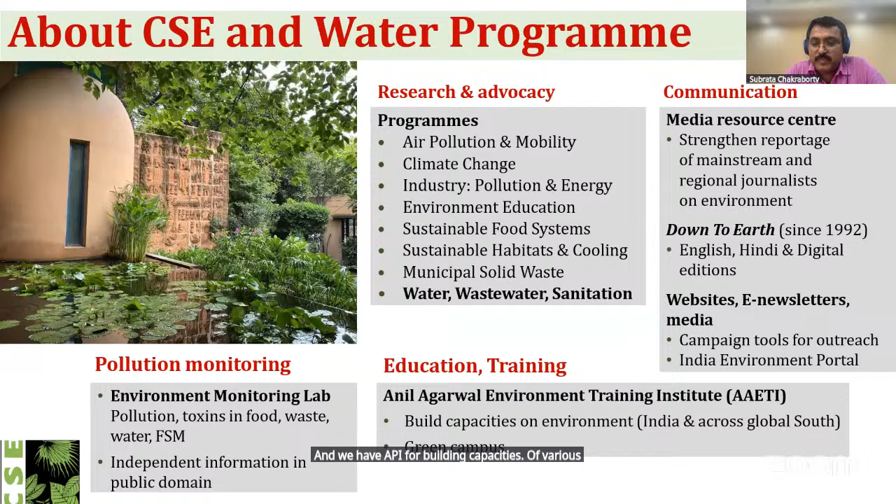Next, please. In our water program, we work in both urban and rural areas, with a water and wastewater vertical, and we work closely with the Uttar Pradesh government. In the water sector, our focus is water sensitive urban design and planning, groundwater recharge, rainwater harvesting, protection and rejuvenation of water bodies, and water efficiency promotion. In sanitation, we work on faecal sludge and septage management, city-wide inclusive sanitation, grey water management, decentralized wastewater management, and reuse of treated water and biosolids.

In UP, we closely work with the Department of Urban Development and support the government in scaling up FSSM, which is closely associated with AMRUT 2.0. We have a team of 15 members of diverse backgrounds. Capacity building is one of our focus areas, through which we have built capacities of thousands of practitioners and policymakers over the last couple of years. Next, please. Our program has close association with various development institutions across countries. Next, please.

And whatever we research, we come up with publications. Those publications are available for public, and all these publications, this is a couple of them, and all the publications are available on our website for easy download.

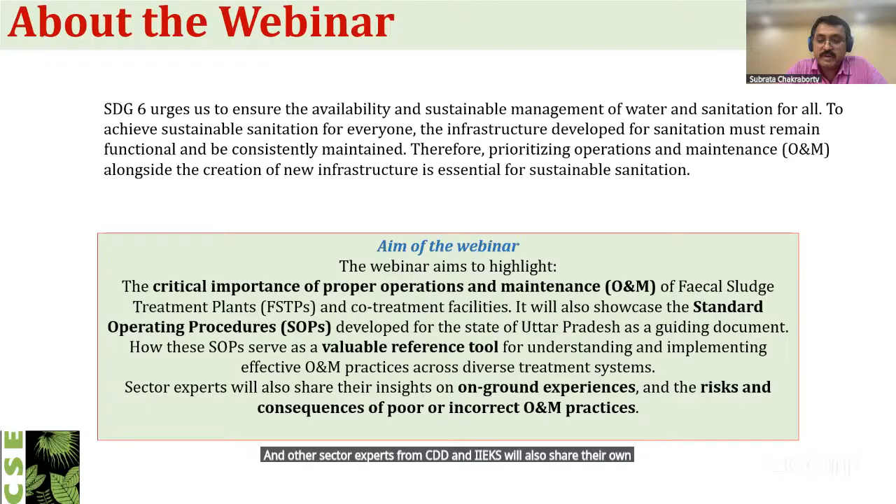Next, please. Urban areas across India and globally are adopting FSSM plants as a sustainable alternative to conventional wastewater systems. In India, Uttar Pradesh, Odisha, Maharashtra have emerged as front runners, and also other countries globally, to mention a few, Bangladesh, Ethiopia, and many other countries are constructing and operationalizing various FSSM plants.

However, on ground infrastructure, the key priority is to have proper O&M in place. And now, as I told, CSE has developed a document which we consider could be critical for many of the countries, many of the plant operators.

Our practitioners from CDD and IIHS have also joined today to share their field experiences so that we have sharing of learning across states here. Today's session aims to empower practitioners with practical tools for long-term FSTP sustainability.

Now, with this, we move to the thematic presentation. This is a very technical session, and the first theme is SOP for O&M of FSTP and co-treatment plants of Uttar Pradesh. Here, Harsh Yadava from CSE will briefly describe the structure of the SOP document and why this could be an important reference document for professionals and for those who are working towards sustainability.

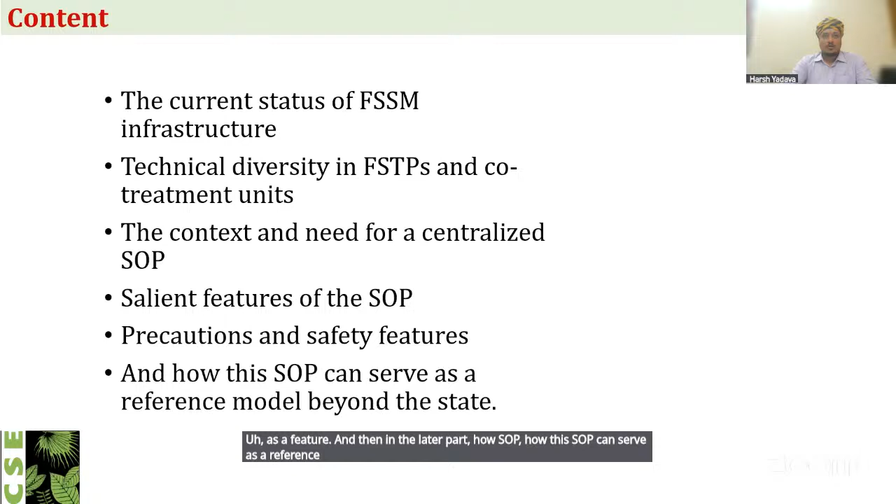And then in the later part, how this SOP can serve as a reference model beyond the state, at national and global stages also. So when we talk about FSSM and Uttar Pradesh, it started

it was followed by a tender of 59 FSSM projects in Uttar Pradesh by the stakeholders, by the government of Uttar Pradesh. Of those, 41 of the projects were completed by 2023 due to some delays caused by COVID-19. And in 2024, out of these 59 projects, 58 projects were commissioned.

Currently, we have 39 FSTPs and 20 co-treatment plants. All these come under different funding agencies like AMRUT, State Mission for Nirmal Ganga, and the City 15th Finance Commission funds.

If we understand how FSTPs have come about, there were around 11 contractors who came up with their own type of treatment configurations, a vast variety of configurations. When the CSE team entered the ground, we observed around 15 to 20 configurations of FSTPs, but later we tried to streamline this into 4 broad classifications, which I'll discuss in the next slide.

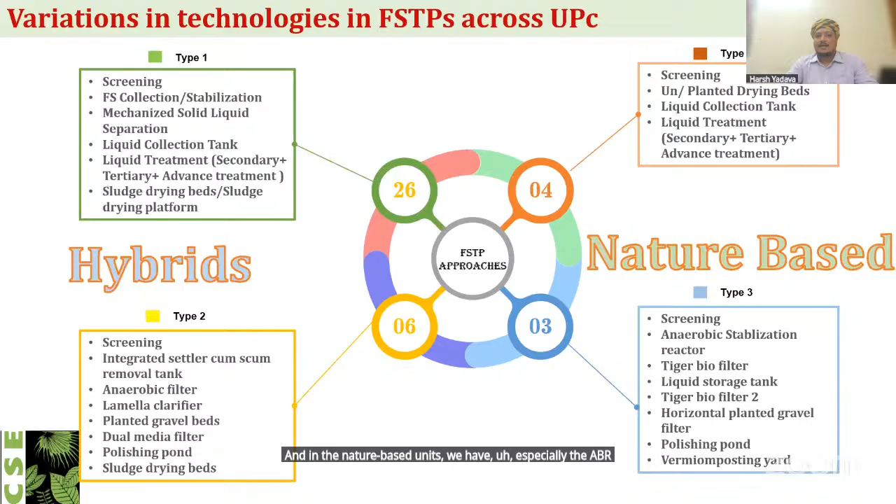Similarly, for the co-treatment plants, we had 6 contractors who came up with their own different types of technologies and configurations. We streamlined it into 5 different configurations. Overall, we have 5 types of capacities: 100 KLD, 75 KLD, 50 KLD, 25 KLD, and 20 KLD. 25 KLD co-treatment plants are the most in number, that is 11.

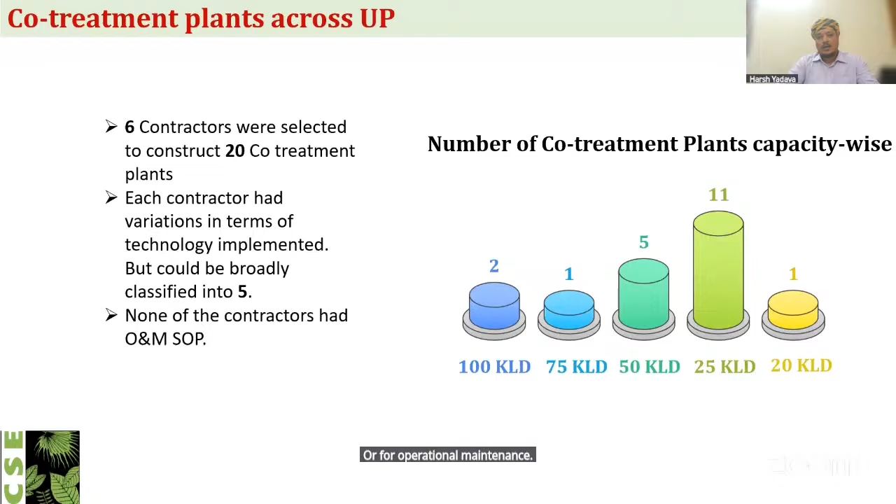As similar to what I told in the case of FSTPs, none of the contractors gave a standard operating procedure for reference or for operation and maintenance. So these are the broad classifications of co-treatment units in Uttar Pradesh. The most common one has a screen chamber, followed by solid-liquid separation, where the solid goes to drying beds and liquid goes under some digestion process in an anaerobic tank and planted gravel beds.

From the previous slides, we understand the basic reasons why the SOP was developed. During this time, it was also understood on the ground that there was minimal involvement by the ULB during the tender process and construction of the FSTPs, due to which there was very low familiarity with the treatment system. Further, as the technologies were very diverse in nature, operation and maintenance was not focused on completely by the ULBs, because there was no reference for operation and maintenance, as SOPs were not present.

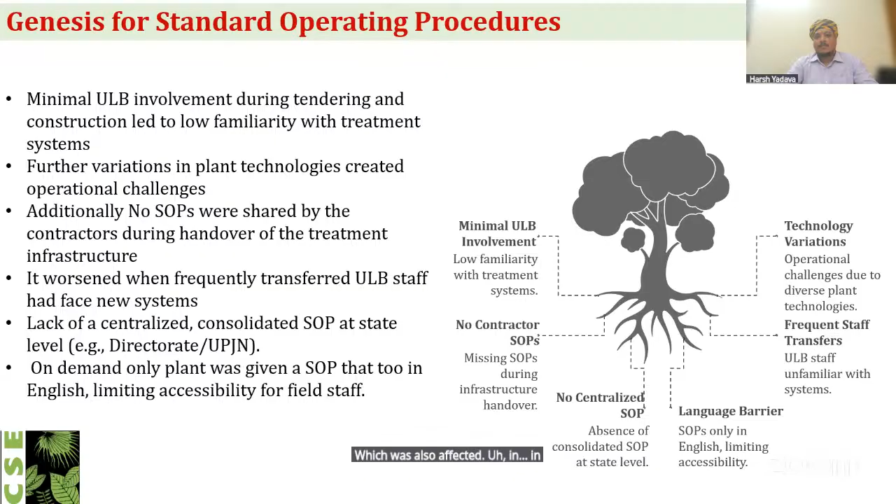Further, as we already know, government staff get frequent transfers. So a staff member who has worked with one kind of treatment technology in one city finds it difficult to cope with a different kind of technology in a different city, with no reference for operation and maintenance. Only one SOP was provided at an FSTP, and that too was in English, which was very difficult for operators to understand. This was also a factor in making an SOP at a centralized level. So all these were the genesis for creating an SOP at a centralized level.

Center for Science and Environment, along with the Department of Urban Development, published this SOP document in December last year. It was launched by the Director of Urban Local Bodies, Mr. Anuj Jhaji. Now let's understand exactly what the treatment process is.

When it comes to fecal sludge and septage treatment, it is a mixture of a vast variety of constituents, solid waste, and many other things. Since there are many constituents, it requires many kinds of treatment processes and systems with multiple processes of treatment: physical processes, biological processes, chemical processes, photolytical processes, and for biosolids, different kinds of other processes.

Physical processes could be sedimentation and filtration, mostly used for separating solids from the liquid part, depending on the specific gravity of the solids to separate from the water when an external agent is introduced. Biological processes are the heart of the treatment, using anaerobic digestion processes to break down the organic matter. Chemical processes are employed at different stages.

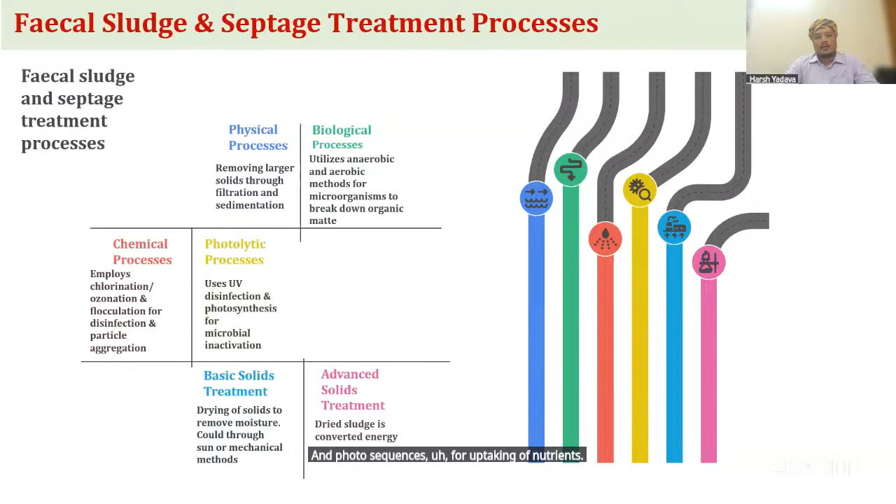As I told you, coagulation is done through an external agent to expedite the process of solid-liquid separation. The photolytic processes, for example disinfection through UV radiation, kill the pathogens in the water. Photosynthesis helps in uptaking of nutrients for purification of the biosolids part.

Now let's understand the treatment stages. We can see primary treatment, secondary treatment, and tertiary treatment. In the primary part, we focus on removal of the solid part. In the secondary treatment part, we focus on removal of BOD and COD and some inorganic materials like nitrates and phosphates. In the tertiary treatment, we focus on removal of pathogens like bacteria, fungi, protozoa, and viruses. Similarly, in the sludge processing units, we do the same by killing pathogens.

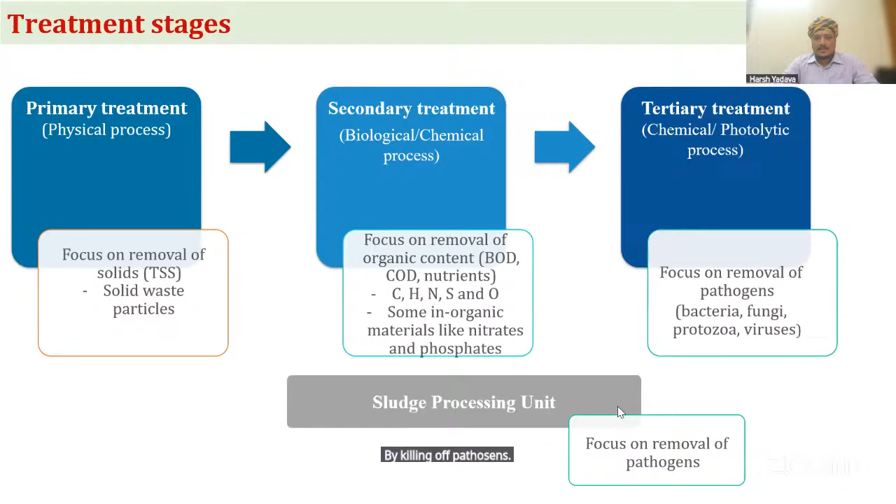Let's move forward and understand the treatment chain for FSTPs of Uttar Pradesh. The treatment chain you are seeing in front is the most common one, used by around 15 to 16 fecal sludge treatment plants of Uttar Pradesh. All these modules included here in the primary, secondary, and tertiary treatment parts are included in our SOP.

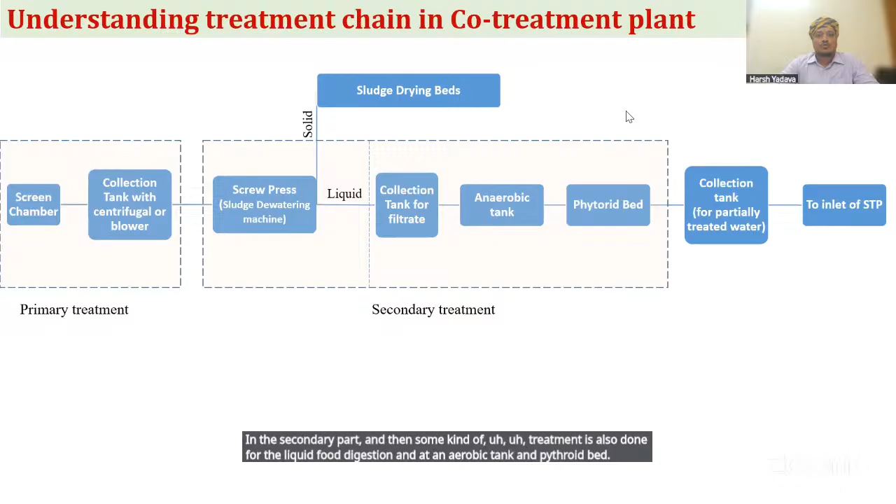Other than this, there are a few other treatment chains whose modules are also included, completing the package for FSTPs. When it comes to co-treatment plants, the most used treatment chain is the screen chamber, followed by a screw press for solid-liquid separation in the secondary part. Some kind of treatment is also done for the liquid through digestion, anaerobic tank, and Phytorid bed. The solid part goes to the sludge drying bed, and the liquid part after the Phytorid bed goes to the STP inlet for further treatment.

Other than the common one, we have other modules also described in the SOP, which we can see here, and it completes the package for the co-treatment units.

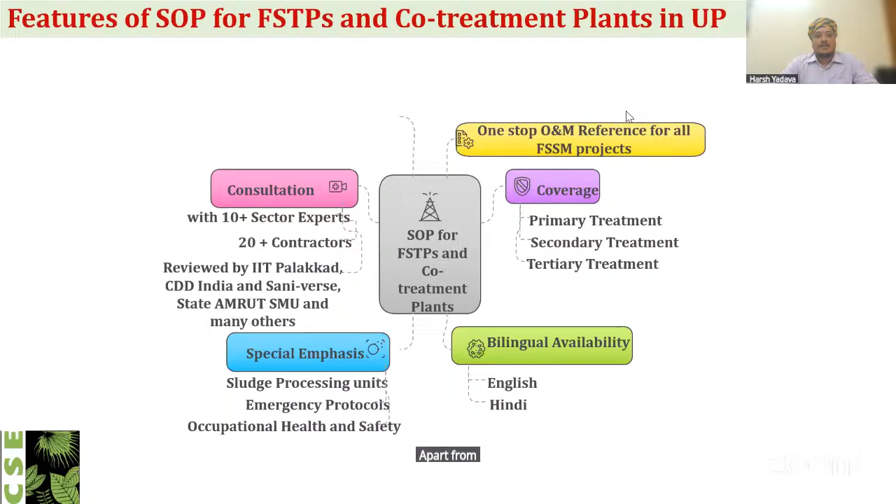So some of the features are already clear from the previous slide. We can say that the SOP is a one-stop reference for all FSSM projects in Uttar Pradesh and at the national level also. It covers primary, secondary, and tertiary treatment. It has been published in two languages, English and Hindi, giving it wider usability. Special emphasis has been given to sludge processing units, emergency protocols, and occupational and health safety units. Before publishing, it was sent to 10 plus sector experts, 20 plus contractors, and also reviewed by IIT Palakkad, CDD, and Saniverse, apart from the State AMRUT SMU of Uttar Pradesh.

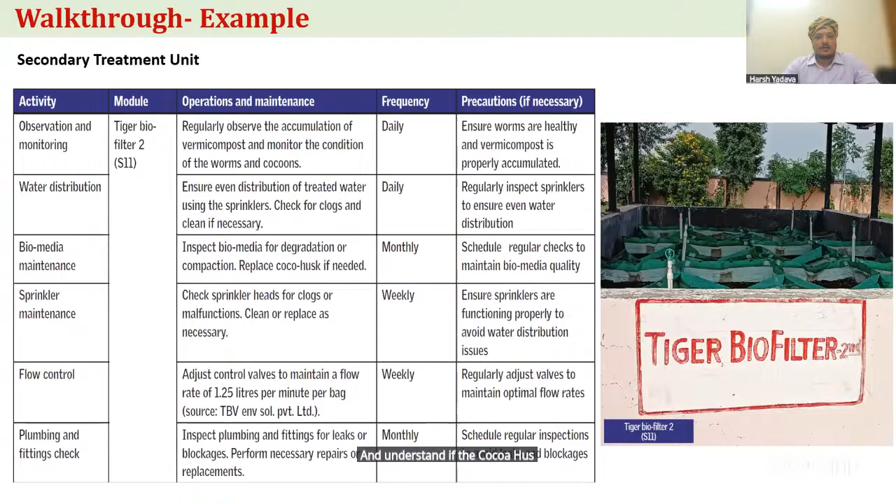Similarly, we have the secondary unit, the Tiger biofilter, second part: biomedia maintenance. Let's take as an example the activity of biomedia maintenance. What is the process here? We have to inspect the biomedia for degradation or compaction and understand if the coco-husk is required for replacement or not. This has to be done monthly.

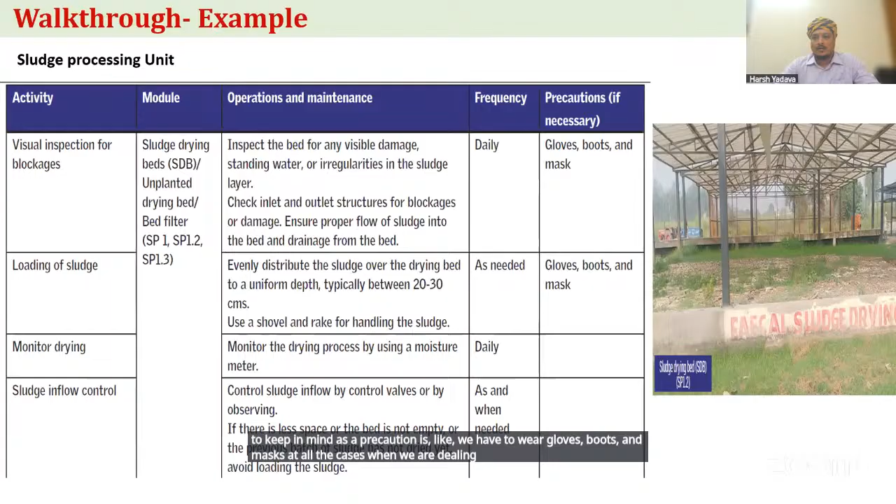We have activity, we have module, and we have operation for sludge drying beds. And we can see what are the visual inspections, the activities that we have to do on the field. If there is an operator, the operator has to do some visual inspection for blockages and understand if there is any visible damage, water standing, or irregularities in the sludge layer. And these things we have to do daily. And the things which you have to keep in mind as a precaution are, we have to wear gloves, boots, and mask at all the places when we are dealing with fecal sludge drying beds.

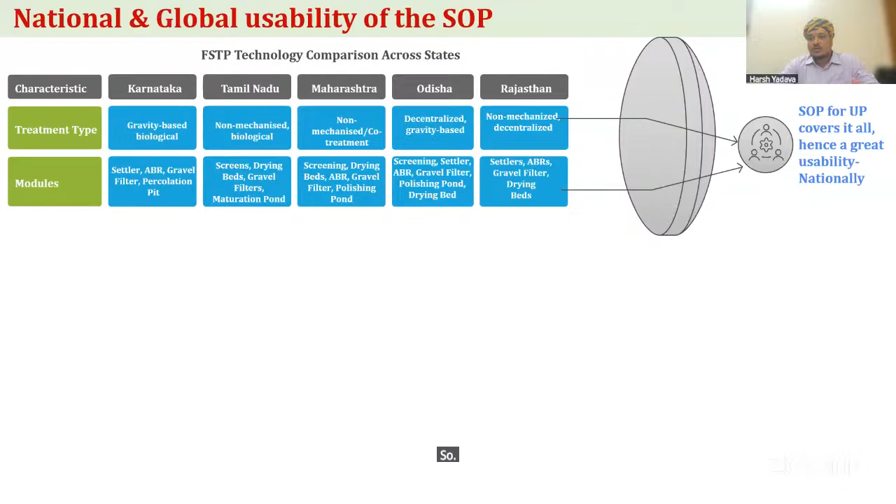So here we have compared different types of modules present in the different states of India. As we can see, most of the common modules present in Karnataka, Tamil Nadu, Maharashtra, Odisha, Rajasthan are already present in the standard operating procedure we have prepared. So the usability of this document increases from here to the national level, and further at the global stage, the countries who are initiating their FSSM projects or entering into tenders can take reference of what kind of treatment chains would be perfect for their own context and setting.

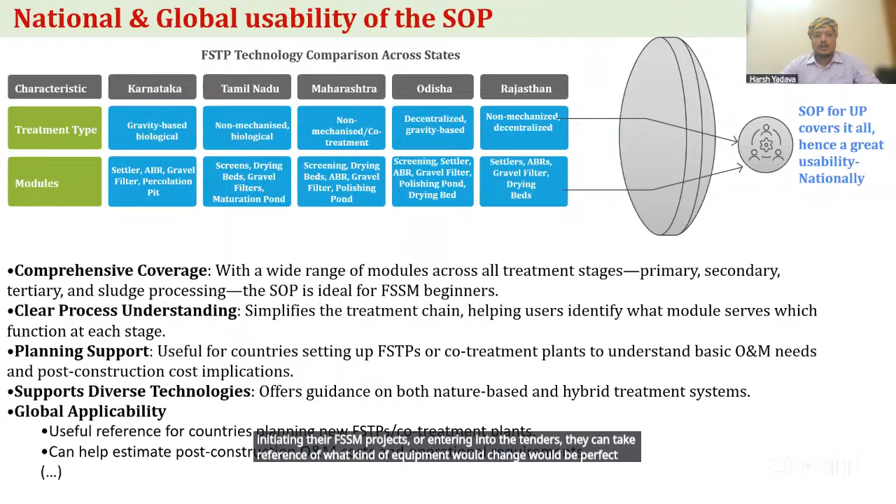Another thing this SOP offers you is that there is a wide variety of safety measures and emergency response units we have covered in this SOP. For example, if there is an accidental spillage from the truck at the fecal sludge treatment plant, what would be the emergency response procedure for that? How will you tackle that? Or maybe your sludge drying bed is flooded. So what would you do? What would be the protocol for that? All these have been included in the SOP.

And Harsh, you actually made my work much easier. But just to start on a lighter note, the picture you have given of me makes me appear such a serious and such an angry person. I'm not actually.

So just to talk about it, as they said, Harsh and Hari were the frontline warriors when they were working in UP, developing and understanding, and creating that environment to make the FSTPs work.

Behind them, we were some kind of soldiers who were giving them those scientific inputs. Based on the engineering design, each of these units had a particular output performance they were designed for, that the contractor had claimed. We went out to these FSTPs, we collected samples, I'll talk about what we did, and then we tried to understand, if something is going perfect, how is it going perfect, right?

If something is going wrong, if there is a challenge, where is the challenge? Where exactly lies the problem that could be mended? And that is how this backing up of the lab actually helped. I'm sure Harsh and Hari and every team would say that it helped them to talk about the science in a layman's perspective, to make them understand and get the FSTPs up and running and improving on their performance gradually.

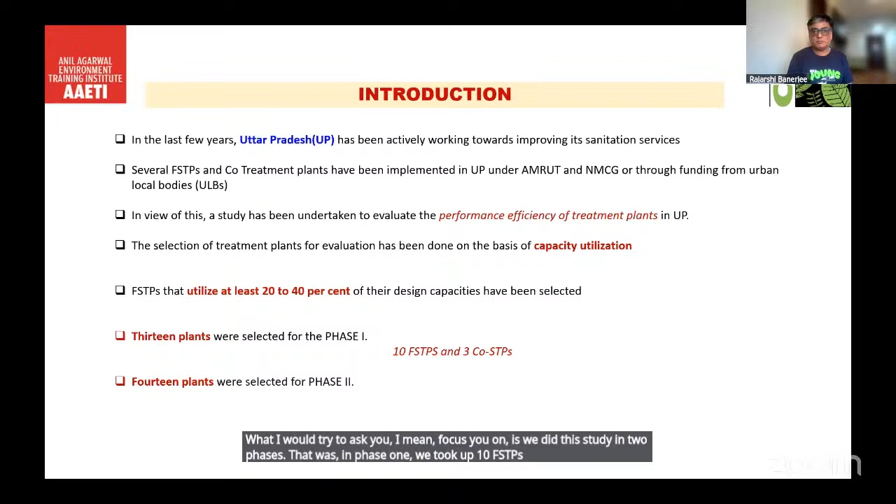So I wouldn't repeat these slides. These are already some repetitions of what we did in Uttar Pradesh and how Uttar Pradesh has been doing. What I would try to focus you on is, we did this study in two phases. In phase 1, we took up 10 FSTPs and 3 co-treatment plants. And we have already published the report. I'll talk about it in brief.

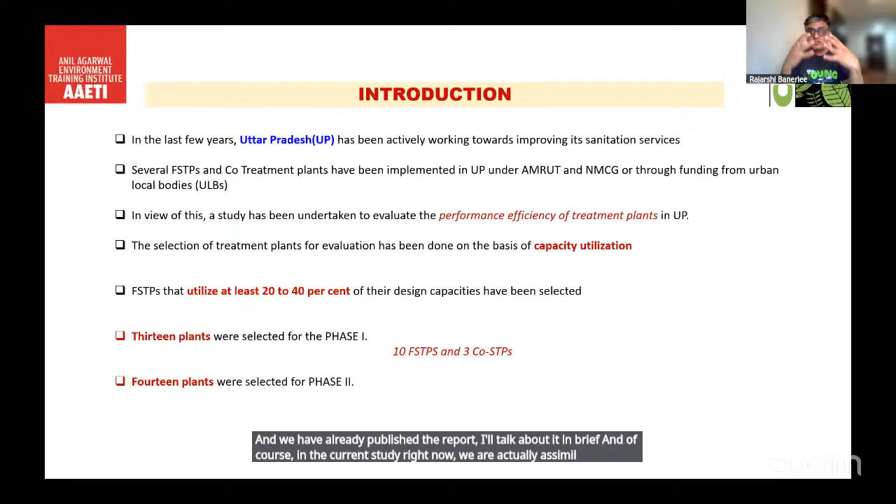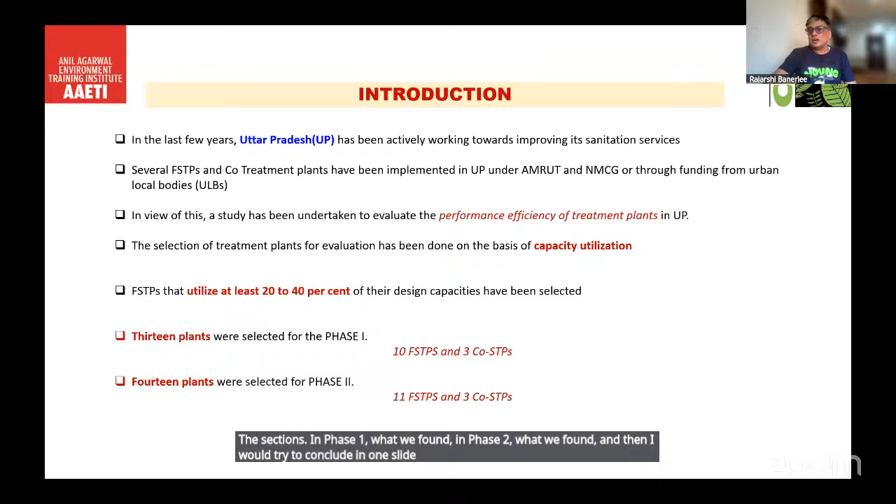And of course, in the current study right now, we are actually assimilating the reports and trying to come up with an understanding, where in phase 2 we studied some 14 plants, wherein there were 11 FSTPs and again 3 co-treatment plants. I would try to talk about both sections, what we found in phase 1 and in phase 2. And then I would try to conclude in one slide what our observations and recommendations are.

So I would say the main module we found is the dewatering system. It is either nature-based, like gravitational or decantation, or an electromechanical dewatering system wherein a screw press was being used. In the next phase, once the water and the solids separate out, the liquid goes through a nature-based series of treatment, wherein the pollutants in terms of nitrogen and phosphorus are reduced, and obviously the indirect pollutants, what we call BOD and COD, get reduced.

And finally, there is a little bit of polishing of the water through different kinds of filters and final disinfection. In the other modules, there was an electromechanical system. And of course, these modules differed. Somewhere we found UV disinfection, somewhere it was chlorination, somewhere it was ozonation. So based on that, we tried to talk about it. I'll show you in a graphical representation what it was.

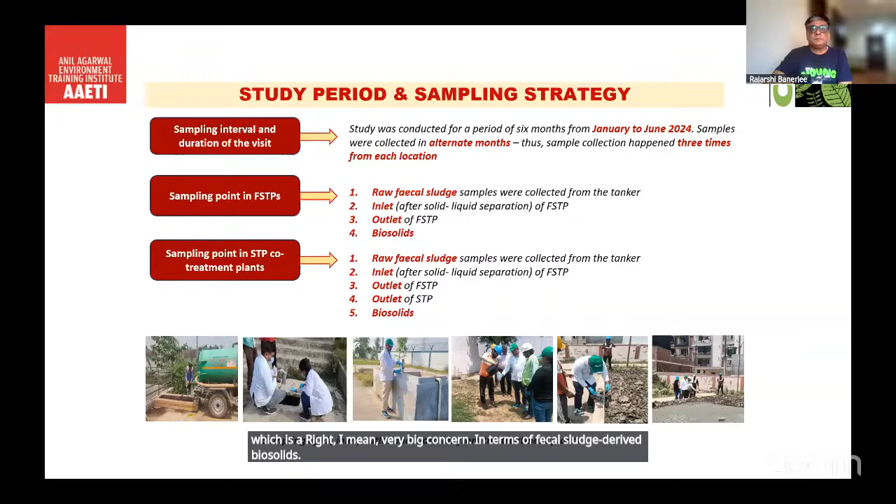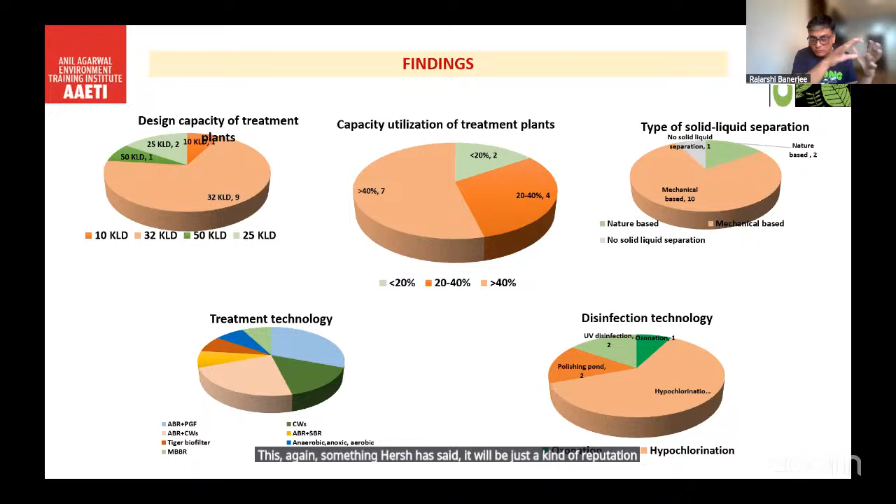And finally, of course, the pathogens, where we study bacterial pathogens in terms of enteric pathogens, as well as the helminths, which is a very big concern in terms of fecal sludge derived biosolids. Now, this is what we found. This is something Harsh has said, it will be just a kind of repetition. There are the different capacities of these FSTPs we had seen.

Of course, our understanding of selecting the FSTPs was, we tried to select which were receiving or which were functional based on the capacity on which the plant has been built. At least 20 to 40% it was operational, that is, it was receiving that much of fecal sludge load. We know every ULB comes up with the FSTP, but getting sludge load is the biggest challenge.

So we tried to select the ULBs which were a bit on the forerunner, where they were able to convince the desludgers, or they had the desludgers who would be bringing the plant to an operational condition. As I said, solid liquid separation, there were nature-based ones. There were mainly the mechanical ones in terms of screw press.

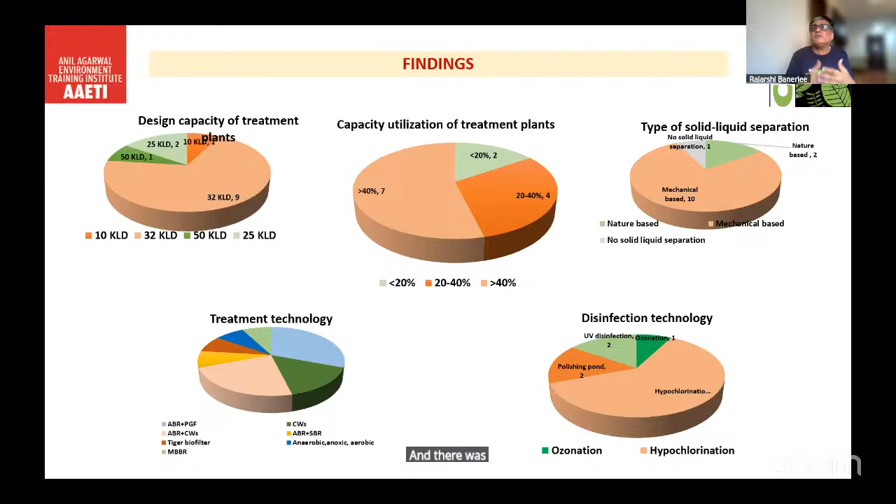Treatment technology, as I said, it was a mix and match of electromechanical and biological, mainly biological, whether it was an anaerobic baffled reactor, a planted gravity filter, a tiger biofilter, or a moving bed bioreactor. It was a mix of biological and mechanical treatment systems. And disinfection systems also, we found the differentiation. There was mainly chlorination, and there was UV ozonation. And finally, there were some systems which was just a polishing pond.

Now, to understand what was the treatment efficiency, for paucity of time I'm not talking about the FS, I'm not talking about the inlet. I would just try to speak on the removal efficiency of the design systems. And when we see the COD removal, it varies from 60 to 90% from plant to plant. Or even the BOD removal, it varies from 50% to almost 90% from plant to plant.

The horizontal line is actually indicating the removal percentage of the COD plant by plant. While on the right is the first set of 3 co-treatment plants we took up. Again, they are showing you the removal efficiencies of COD and BOD respectively.

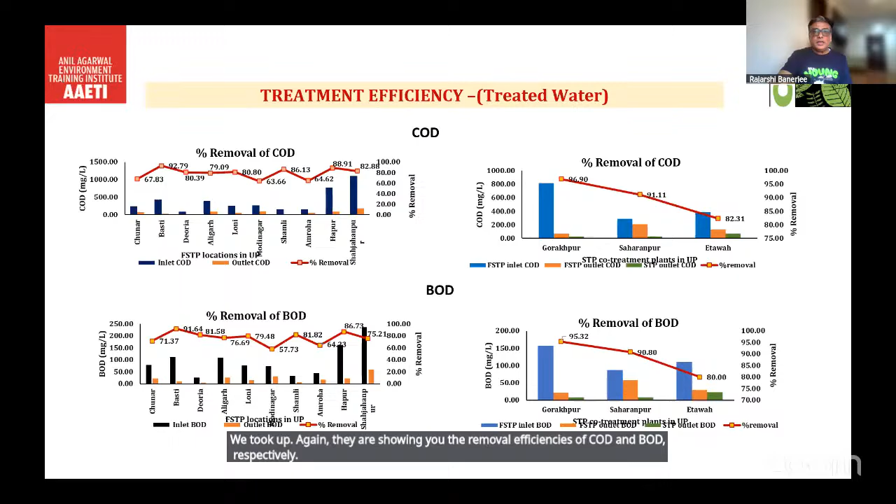And very few of the FSTPs like Aligarh, Modinagar, we found very prominently failing in most of the parameters, because the biggest problem with Modinagar was that there was no solid liquid separation module. So everything entered into every unit one after the other. The first step in FSM is always separating the solid and the liquid.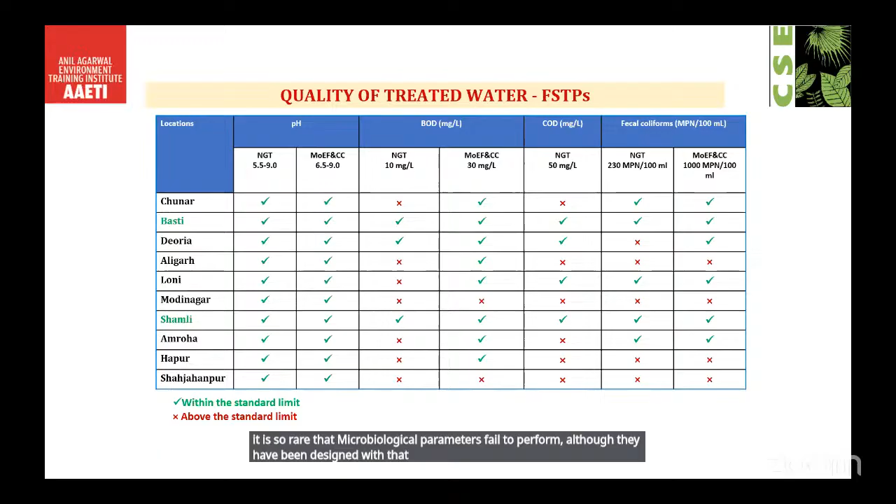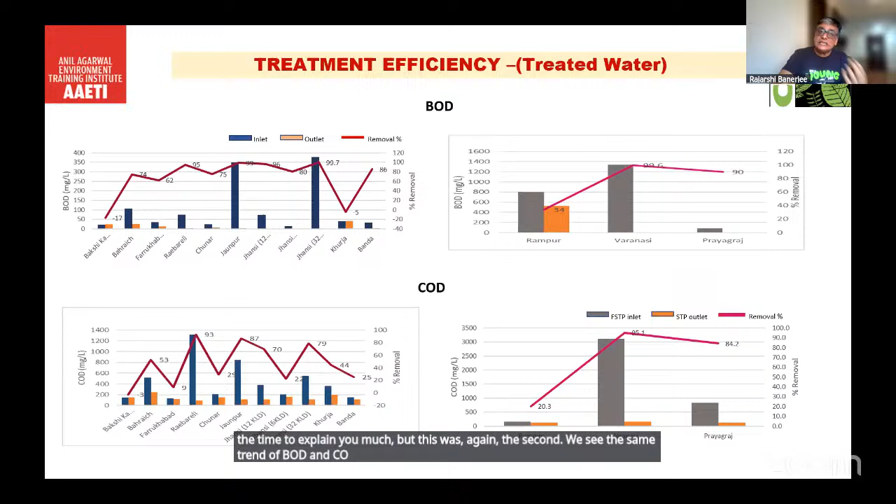Yes, sure. So this is again with the biosolids. I would share the slides. I don't have the time to explain much, but this was again the second. We see the same trend of BOD and COD removal, TKN and fecal coliform removal.

When you talk of the biosolids, the moisture content plays a very crucial role. The more the moisture content left in the biosolids, the more are the chances that the microbial pathogens, whether it is the helminths or certain microbial species like Salmonella, would start growing after a certain point of time.

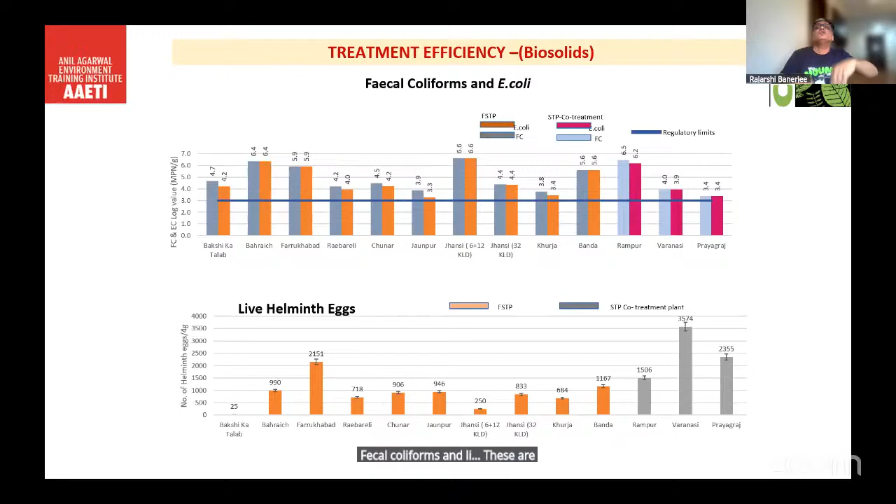Of course, carbon-nitrogen ratio is the balance to decide whether it could be used as a soil amendment or not. Fecal coliforms and the pathogen content are related to the moisture content. More the moisture content, more are the chances that they will be present. Less the moisture content, less are the chances that they will be present.

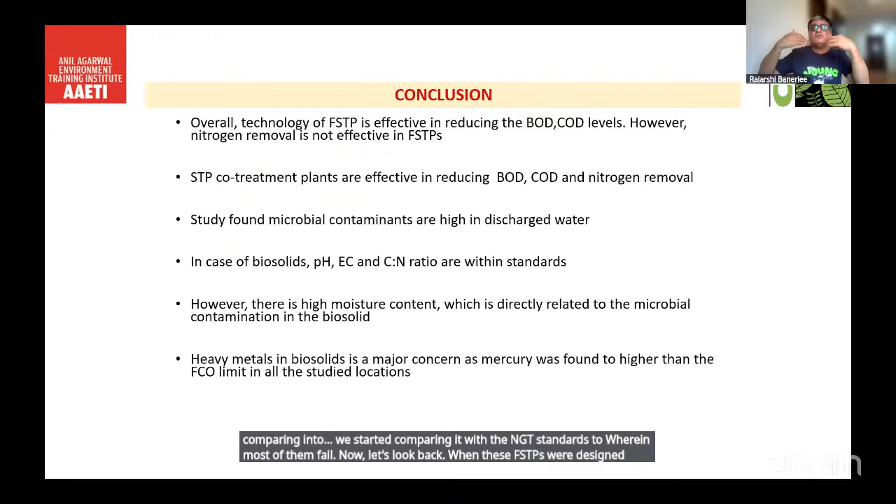However, most of these FSTPs did perform to the expected level. But the problem was when we started comparing them with the NGT standards too, wherein most of them failed. Now, let's look back. When these FSTPs were designed, they were designed according to the CPCB standard norms, or the MOEFCC output standards. They were not designed for the NGT standards, which are far more stringent.

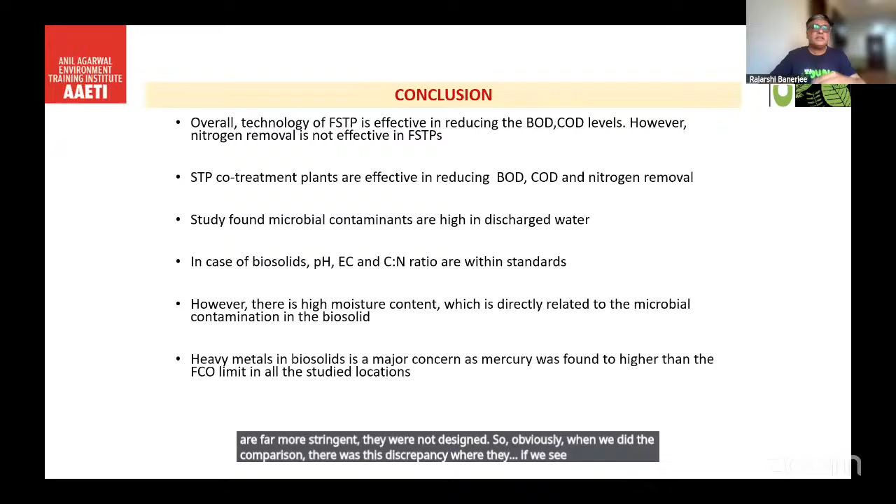So obviously, when we did the comparison, there was this discrepancy. In one of my tables, you have seen that most of the times they actually performed according to the MOEFCC, but failed at the NGT standards. So nothing wrong with the design, nothing wrong with the engineer. If there are certain failures, it is because of a lack of proper operation and maintenance.

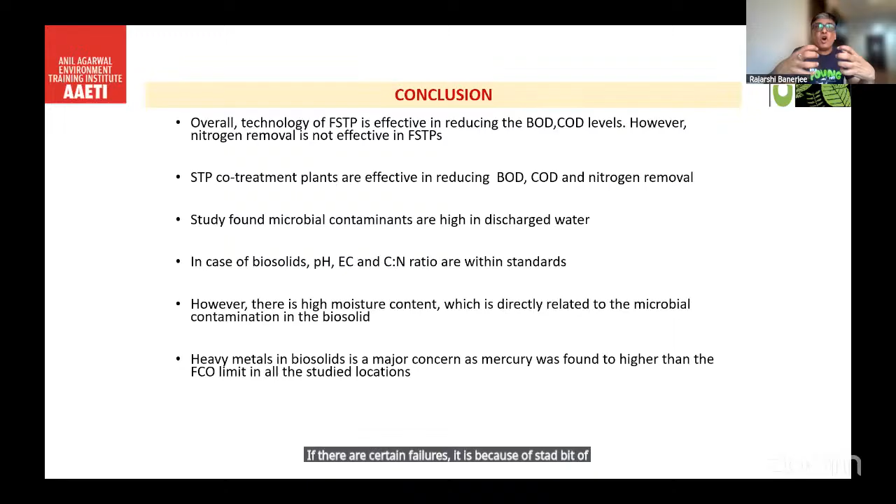Now, let me tell you a simple thing: dewatering. Every dewatering system needs a proper hydraulic retention time. You have to hold it for some time, let it settle down. Only then proper separation occurs and further treatment is helped. If it's mechanical, the polymer concentration you are adding and the polymer dosing rate play a very crucial role. We often found that understanding of this was very vague among the plant operators.

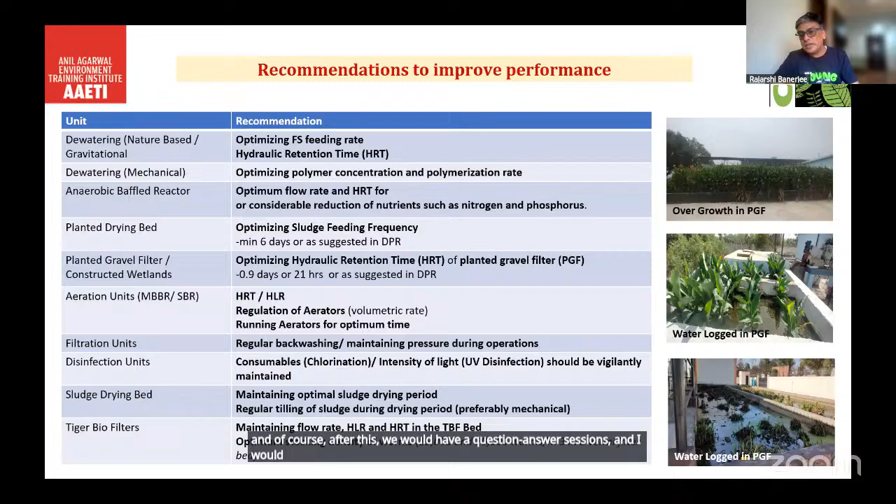Thank you for sharing your findings from your team's visit to 27 plants of Uttar Pradesh, and also sharing the treatment efficiency of the plants. It is very difficult for us to check the quality of the treatment without seeing things through the lens of the laboratory. That's why the lab visit is so important and critical, to understand whether the plant is actually working and whether the treatments are efficient in terms of meeting certain standards. You have also highlighted the emerging priorities of the plants and the way forward for some of the cities and plants.

And as you have said, in Modinagar the basic thing, the solid-liquid separation module, is not available, but this is crucial to maintain certain standards. And definitely, I know our team is working with the Modinagar urban local body to install this module. Thank you, Rajarshi, for that.

Now we quickly move to theme 3, which is ensuring long-term sustainability of FSTPs, addressing operational challenges and enabling resource recovery. Resource recovery is a crucial component of wastewater treatment plants and also of FSTPs. CSE is also doing critical research on reuse and resource recovery. However, today Girija from CDD will be sharing her experience.

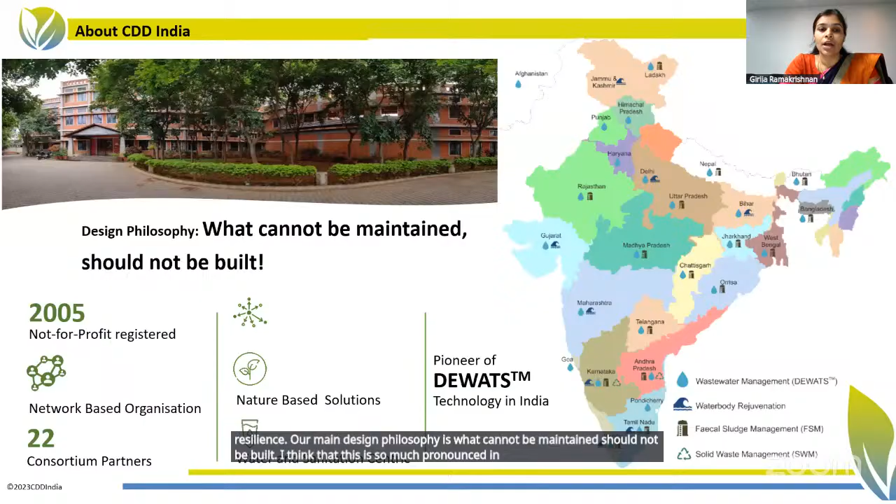CDD is a not-for-profit organization registered in 2005. We work across different sectors, from water body rejuvenation to used water management, and recently we are also working on water security and urban resilience. Our main design philosophy is: what cannot be maintained should not be built. I think this is very pronounced in today's discussion. Predominantly in India, we have drying bed technologies, unplanted drying beds and planted drying beds, and other technologies which we have visited across the country.

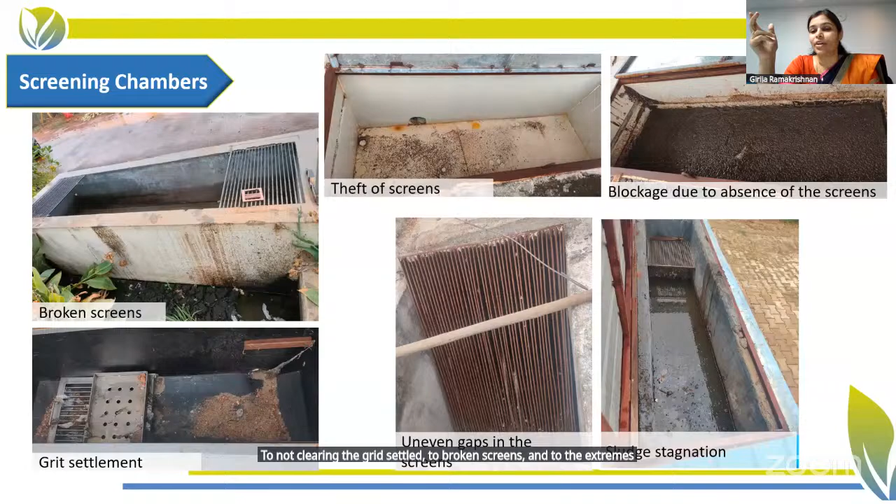When we talk about operational challenges, it might be because of poor design issues, poor construction quality or implementation issues, poor operations at the site, or a combination of all these. Across these modules, we have seen issues like inclination of the screening chambers, uneven gaps between the bars, not clearing the grit settled, broken screens, and even screens being stolen.

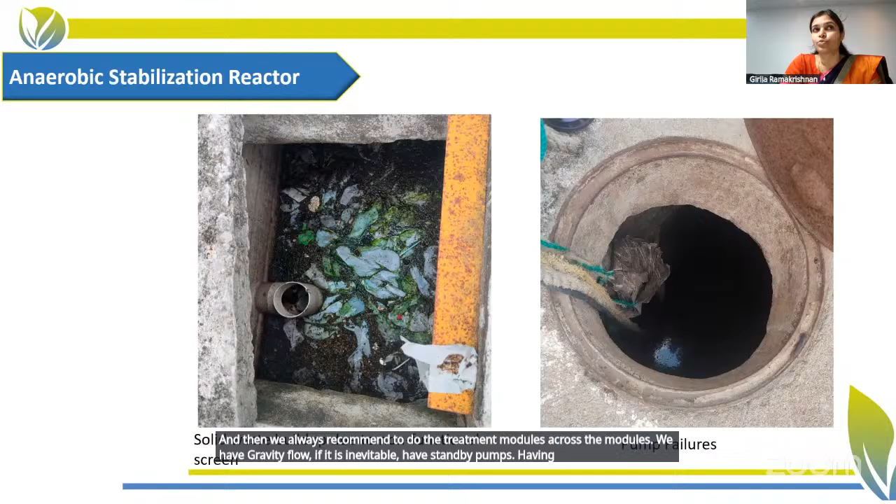All this leads to solid waste buildup in the next module, the anaerobic stabilization reactor, making it non-functional and causing the entire treatment system to fail. We always recommend gravity flow across the modules; if it's inevitable, have standby pumps. Having a standby pump seems small, but if the pump fails, getting it repaired takes a lot of time, and the halt in operations affects the next modules.

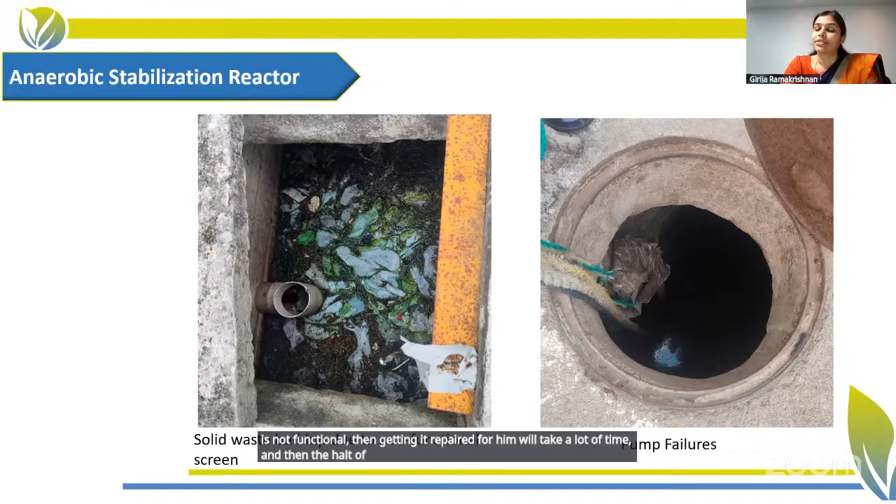In the unplanted drying beds, we've seen that while removing sludge, the filter media is also taken out along with it. So we recommend having a mesh above the filter media to avoid this. This leads to level differences in the beds, which Harsh also mentioned checking for. There are also issues like damaged pipes, and in extreme cases, standby beds being used as storage areas.

In planted drying beds, we've seen issues ranging from absence of plants to dried plants to excessive plant growth that isn't properly pruned, not maintaining plant density or spacing, as Rajesh mentioned, and random growth in standby beds. There are broken roofs too, which are anthropogenic activities affecting our systems, like bottles, waste, and debris in the beds. Also, loading sludge above maximum level or removing sludge from the PDB before it reaches maximum—all kinds of issues we've seen at sites.

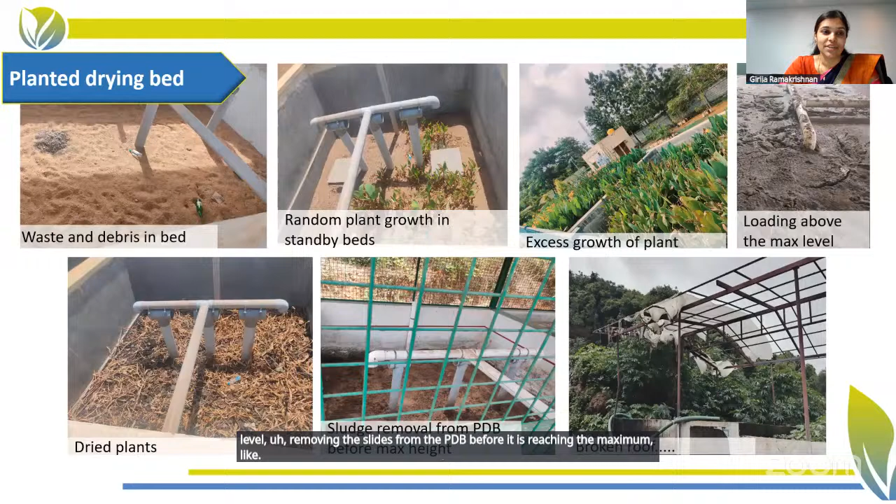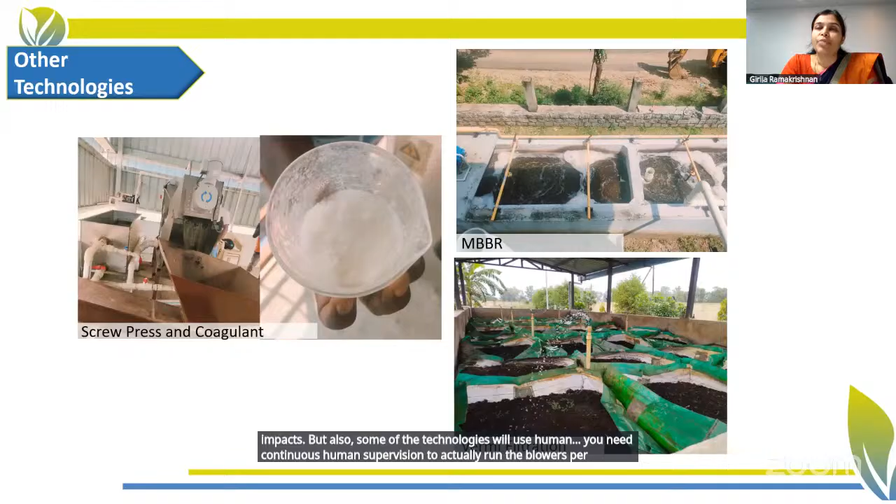We've also visited other technologies like thermal treatment and electromechanical technologies, which use coagulants and polyelectrolytes. Personally, I feel it's still a gray area to understand the fate of these coagulants when the sludge is applied to soil—how it affects the soil, plants, and health impacts at the next level. Some technologies also need continuous human supervision to run blowers for aeration and pumps for sludge distribution, making them energy intensive and labor intensive.

So we need SOPs for different treatment technologies, and it's important that we follow them. When it comes to composting, if not done properly, there are issues with leachate and odor. We've also seen good practices on the ground, like people using accelerators to speed up the process, decomposers, earthworms, and all that.

In Devanahalli, we demonstrated different kinds of composting—bin composting, windrow composting, vermicomposting, all kinds of composting. I think this would be the first in India to have different composting methods demonstrated with fecal sludge.

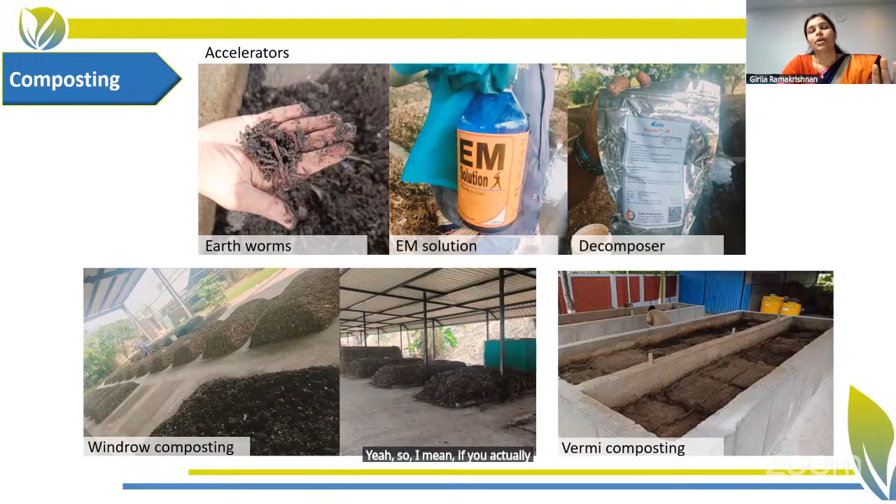If you actually do the composting properly, I'll also show that it can be done better and it can smell good.

As a designer, our thinking is all about what should be the HRT level and all that. We never think from the point of view of the operator, what is ease of operations for him. For example, can we lower the screens at the inlet so it avoids fecal splashes, or raise the inlet pipe so it avoids submerging of the pipes. Having small things like a water pipe next to the inlet will help him clean the pipes and even help himself.

Also, in the planted drying beds, we have seen dried plants with no growth. Can we think about having some nurseries? Because procuring plants for the planted drying beds again takes time, so can we have some kind of nurseries for the plant species for PDBs?

And in case of ASR, if it is overloaded, to understand the load level, can we think about having level sensors that give an alert on overloading? Can we take further load in all these cases? And if the plant is full or shut down, can we have some backup modules, a buffer to actually get more loads, if it is inevitable that we have to receive them?

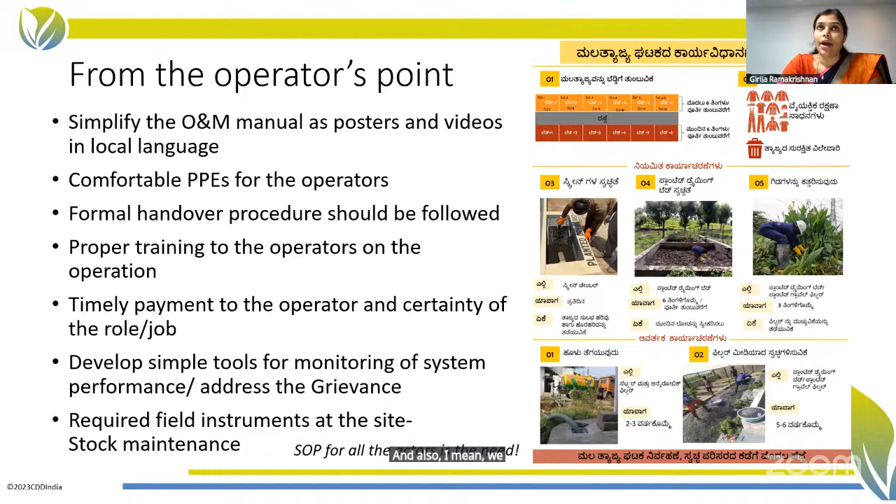We also always recommend having a backup stock of maintenance items. All required instruments at the field should be there, because these small details will actually affect the plant. If one thing is not there and the operator is waiting for stock, that will lead to dysfunction of the plant. So the main focus is on how these operation and maintenance issues affect the output quality.

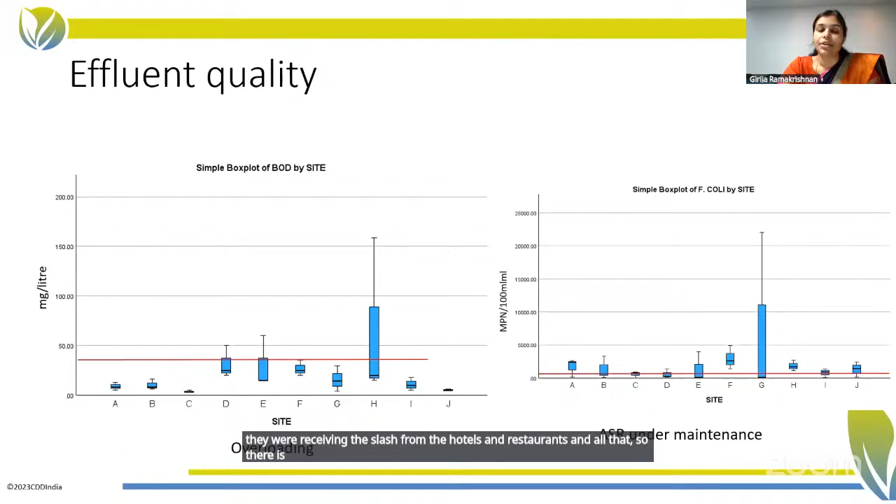If you see the effluent quality, this is the BOD we have seen in one of the sites, above the prescribed limits. In this particular site, there was overloading, and they were receiving sludge from hotels and restaurants. So there is higher organic matter, lesser retention time, and that is leading to the BOD level shooting up.

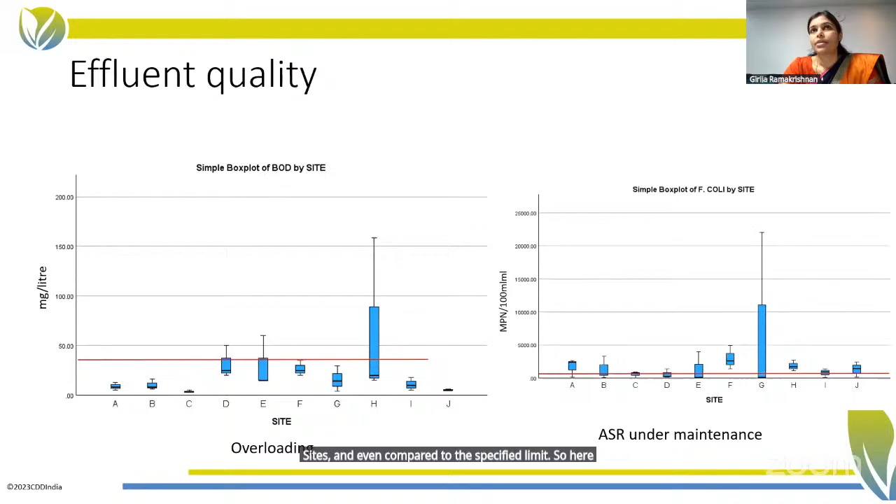In one of the sites, we have seen fecal coliforms significantly higher compared to any other sites, and even compared to the specified limit. Here the ASR was under maintenance for a longer period, which affected the settling of solids, and along with the suspended solids, the coliforms also moved on to the effluent. So all these are related to how O&M issues are affecting the output quality.

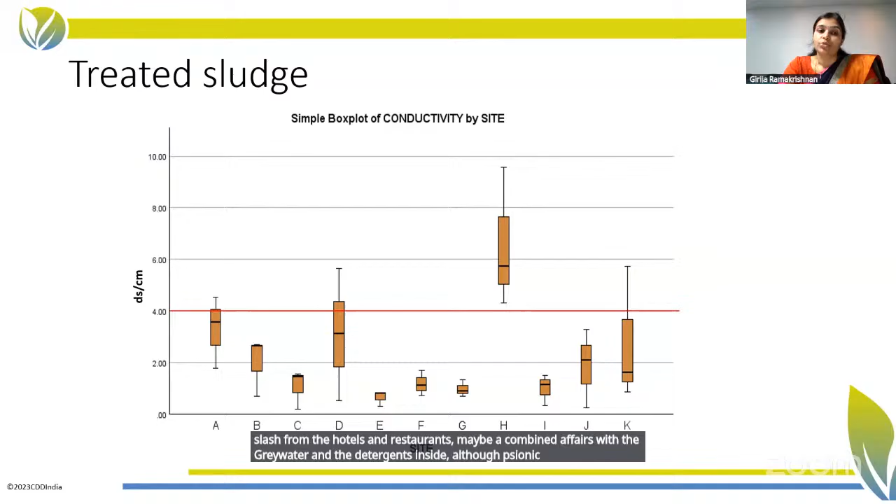In case of sludge, in one of the sites, electric conductivity was very much higher. This is because this particular site was receiving fecal sludge from hotels and restaurants, maybe a combined FS with grey water and detergents inside. All those ionic compounds from these detergents would be shooting up the electrical conductivity of the sludge.

When we talk about long-term sustainability of FSTPs, we need to have proper design, proper construction quality, implementation, and operations all in place. Across the country, the FSTPs which are working well are the ones having simple operations, because there the operator knows what to do. So it's important that way. We need to have dedicated human resources and dedicated funds for operations. These are things we already know.

We need to have collaborations with the truck operators, with the taluk panchayats, with the village panchayats, so that we can secure regular loads and have control on the loads. We also need to explore IoT options to automate operations, which will ease operations at the site. For operator satisfaction, it's definitely a need to prioritize odor control, have that aesthetic feel, and community participation across.

When we talk about resource recovery, we have seen most FSTPs where the sludge is piled up, mainly because there's less engagement of the farmers, who are the primary users, with the FSTPs. It's important, like in Devanahalli, it took us a lot of time to engage with the farmers, and a lot of hours was invested in building their awareness, getting their trust by showing them the quality of the sludge with certificates, demonstrating results on the ground. It requires continuous engagement.

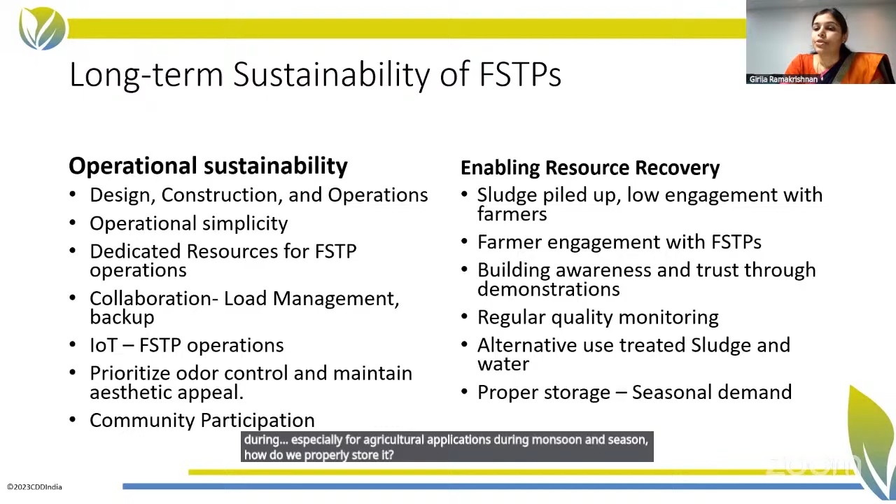Also, because it's a seasonal demand, you need the sludge only during, especially for agricultural applications, during monsoon and rabi season. How do we properly store it and then sell it during those seasonal times is important.

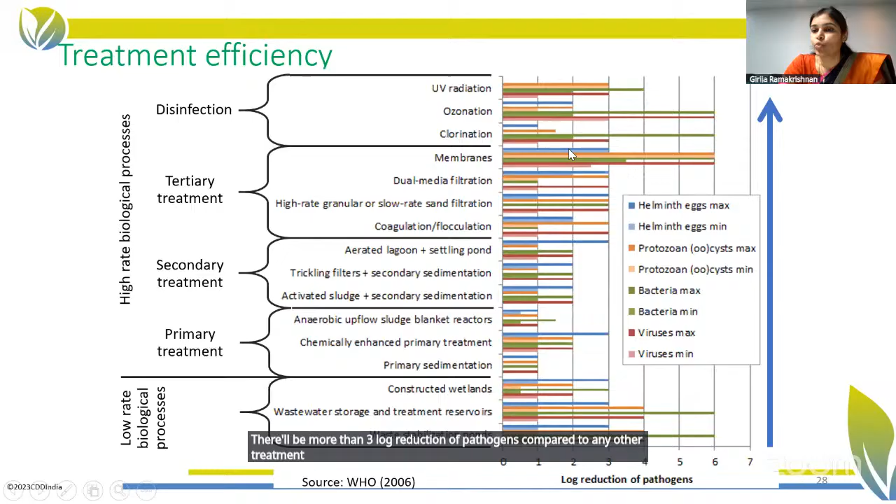When we talk about resource recovery, from 2015 till here, we have done a lot of research and actually implemented on the ground in terms of recovery. Why is it important? Because used water, if you use it, meets it's rich in nutrient content, it can actually meet almost 40% of the global fertilizer requirement, equivalent to $14 billion of revenue generation. In case of used water, low rate biological treatment processes actually eliminate the pathogens, with more than 3 log reduction compared to any other treatment systems. Disinfection also works well, but that is expensive, and can be recommended for drinking water quality. So low rate biological treatments are more efficient in removing pathogens.

These are some cases where we have used the treated water for growing crops, from vegetables. Simple things like having a polishing pond, growing high-growing crops, have actually reduced the coliform numbers. We have also seen the nutrient content of crops grown under treated water was higher compared to fresh water. This is all published online, available.

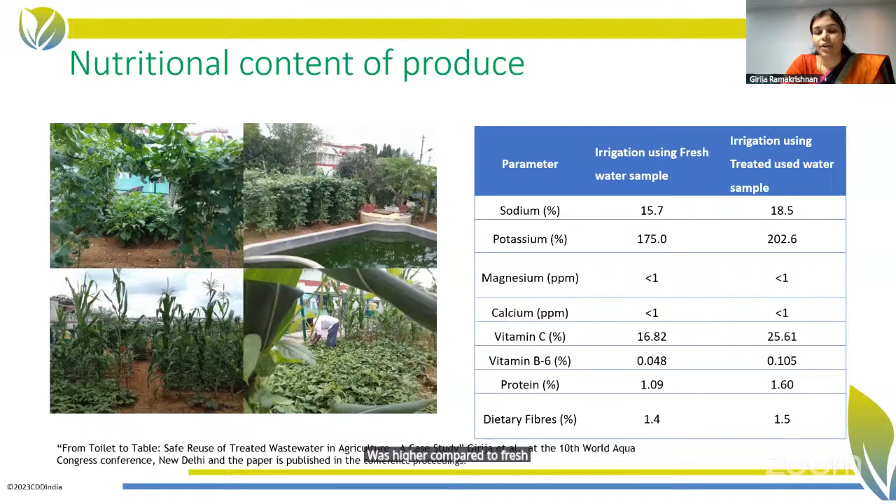Then, what is the rationale for using sludge? Coming to the sludge, our Indian soil is deficient in most essential plant nutrient content, NPK and micronutrients, which is called the hidden hunger. So what do we do? We have estimated the potential of fecal sludge. It's published in the policy document where we said around 326 tons of urea per day can be replaced if we actually use the treated fecal sludge generated in India, which can replace 42 million USD per annum of savings.

Yeah. So for this, what we have done is for Devanahalli, we have done the co-composting to eliminate the pathogen contaminations and to ensure there is proper nutrient balance.

So there is 2 minutes, Girija.

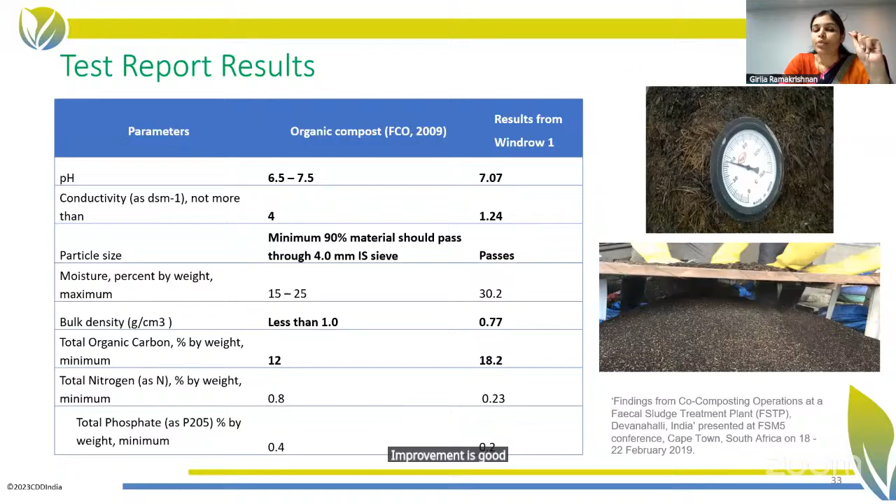Yes. So when we talk about composting, if it is done properly with the proper procedures, there'll be no leachate issues, there'll be no odor issues. So there's a proper procedure which we follow. And then the quality of the output which is coming from the compost was tested against the fertilizer control order, where our compost met most of the parameters per specifications. Yeah, and now it is bagged and sold to the farmers.

And then this co-compost was applied to the field to understand the crop growth and development and yield. What we have seen is co-compost has actually given higher yield compared to the treated sludge, compared to even the chemical fertilizer. So because we are balancing the nutrient content, it's important that we do co-composting.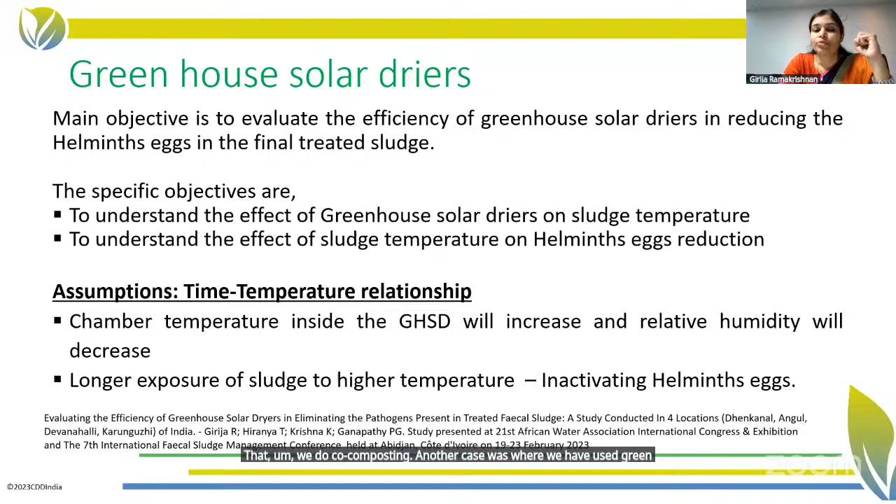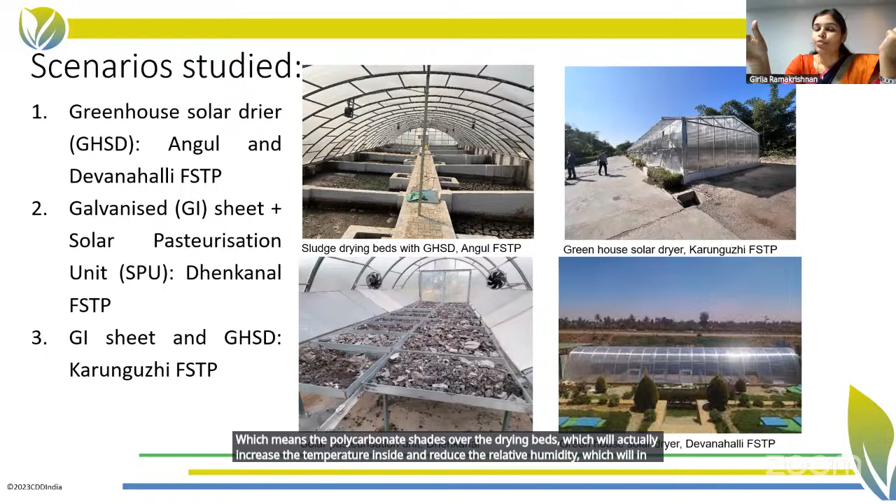Another case was where we have used greenhouse solar dryers, which means polycarbonate sheets over the drying beds, which will actually increase the temperature inside and reduce the relative humidity, which will in turn help in fastening the drying process and reducing the pathogens, especially helminth eggs. So we have used IoT in this, like sensors to take real-time monitoring data of the temperature and the relative humidity of the ambient conditions and inside the chamber.

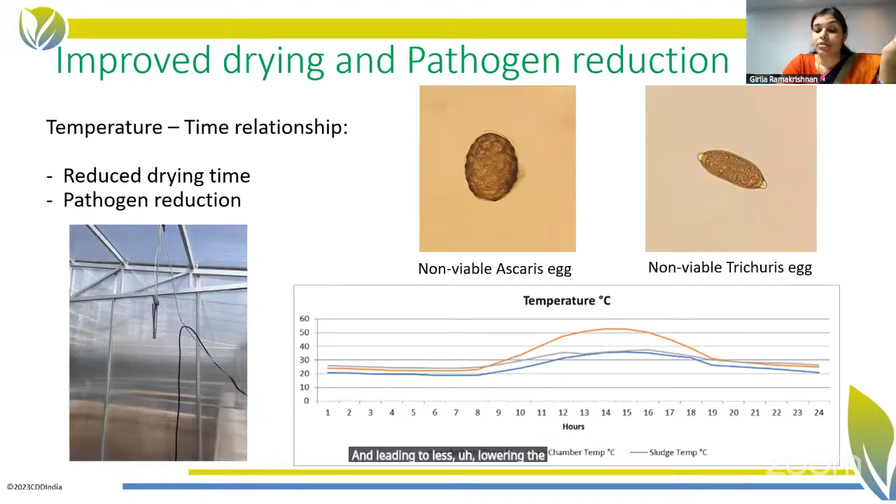What we have seen is that chamber temperature was almost 15 degrees Celsius higher compared to the ambient conditions, and it was even higher than the GI sheets, normal sheets. So during peak hours and throughout the day, it was 8 degrees Celsius higher, and there was a significant drop in the relative humidity. All that has helped us in reducing the drying time. There was 40% reduction in drying time, and hence fewer beds, leading to lower capex. And more than 90% of the samples tested were devoid of helminth eggs.

Yeah. And then we also continuously engage with the farmers. This is a recent farmers workshop that we had. This is very much important: if we want to enable resource recovery, it is important that we engage with the primary users, have continuous engagement with the farmers.

Yeah, these are some of the publications. You can check all this online. They are available. Thank you so much for the time. Any questions? I'll be happy to take.

Thank you, Girija, for sharing some of the interesting research work that you people are doing. Very interesting. And also, when you start with the design philosophy, we should not build anything that cannot be maintained. That's a very interesting line. And seeing your last couple of slides on the reuse, I'm just thinking whether we also add that we should not build anything that doesn't consider the reuse of the end products. This is a very important thing nowadays because biosolids are piling up and we do not know what to do with this given the policy norms we have currently. Very interesting. Thank you very much for your time, for your presentation.

Now I quickly move to our next thematic presentation, which is around strengthening and sustaining operation and maintenance for fecal sludge and septage treatment systems in Tamil Nadu, enabling effective service delivery for environmental and public health outcomes. To present this, we have Srinithi Sudhakar and also Shashi Kumar Ishwarmurthy. Thank you for joining us, Srinithi and Shashi.

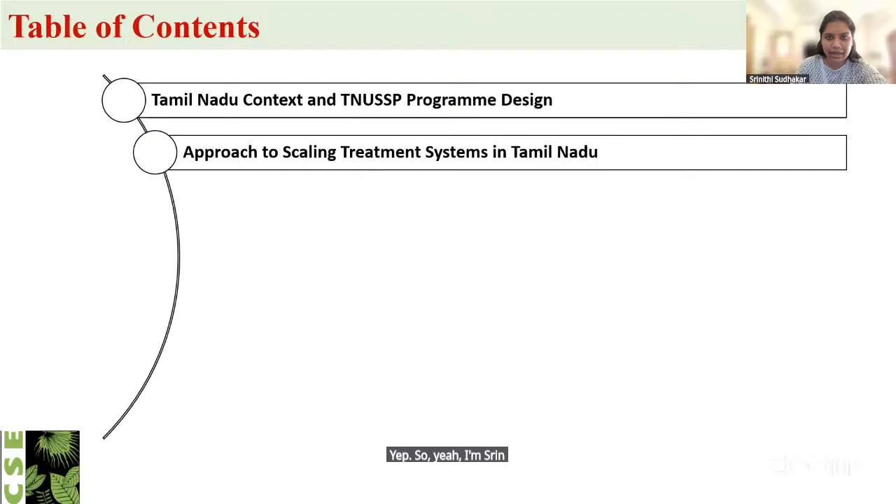So before we get into the core content of the PPT, this slide actually summarizes all the key areas of work that will be made in this presentation. So this is just for your purview. And I will be setting the context to this presentation. Since we have participants from different countries as well, I will quickly mention the sanitation context in Tamil Nadu. What is the status of sanitation in Tamil Nadu? And then the program, the Tamil Nadu Urban Sanitation Support Program, what is the approach behind it? And what was the approach behind scaling of treatment facilities in Tamil Nadu?

So as you can see in the slide, like many other states in India, in Tamil Nadu as well, many of the urban households were very dependent on on-site sanitation systems. So the Government of Tamil Nadu in 2014 issued operative guidelines for septage management. And then in 2015, the Tamil Nadu Urban Sanitation Support Program was initiated, and we started helping the government in implementing FSM interventions across the state. TNUSSP is the acronym which we use.

So the Tamil Nadu program was executed in 3 phases. In the first phase of the program, we were demonstrating FSM innovations and interventions in model locations. One was Tiruchirappalli Corporation, and then 2 other smaller town panchayats in Tamil Nadu, Narasimhanaikenpalayam and Periyanaikenpalayam. In Periyanaikenpalayam, we have the first mechanized treatment facility in Tamil Nadu, which is successfully operational till date.

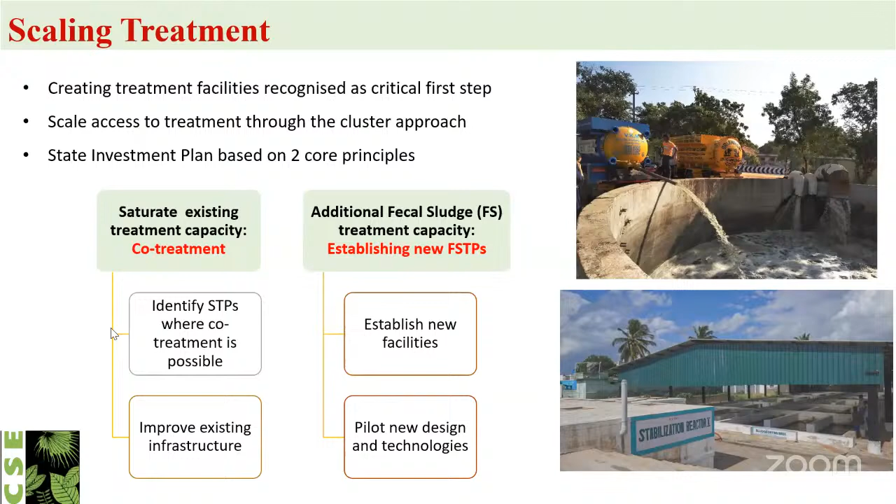So in the state investment plan, we planned phases 1, 2, 3, 4, 5. Phases 1 and 2 are existing facilities, STPs, how to initiate co-treatment. Phase 3 is creating new fecal sludge treatment plants. Phases 4 and 5 depend on land. Land was not available at that time when we prepared the 2018 state investment plan. So now, under SBM 2.0, STPs become FSTPs for phase 4 and phase 5.

And also we are focusing on rural areas. Urban-rural cluster mapping we have also done. Almost 12,525 village panchayats are planned to be clustered with urban local bodies. Now around 3,000 village panchayats are clustered in phases 1, 2, 3. That initiative is also going on. This is the next slide.

So initially, all FSTPs in Tamil Nadu are co-located in solid waste management sites. Why? Because the treated sludge is then co-composted with solid waste. So that is the initial plan. That's why we proposed FSTPs located in SWM sites.

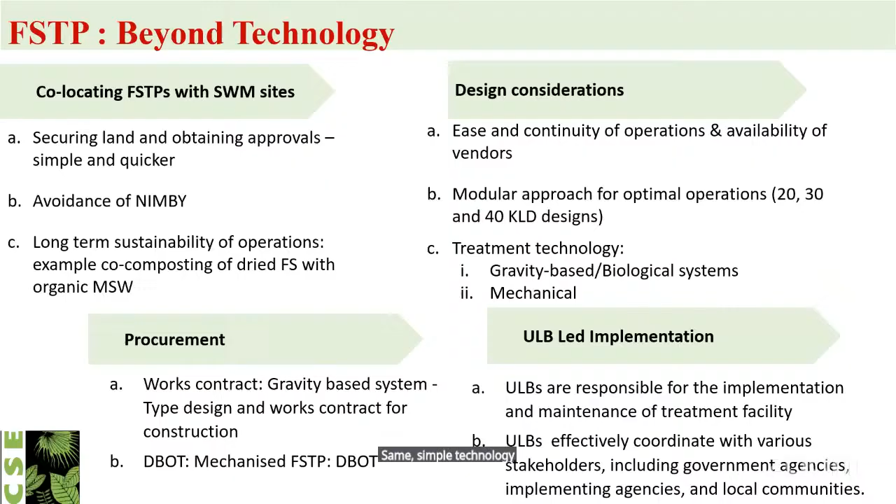Once we receive sludge, we check the pH, EC, color and odor, and only then we allow the unloading. If industrial load enters this gravity-based biological system, the entire plant will be affected. That's why we framed a screening protocol so that each ULB will follow it.

And also regular removal of solid waste. The screening chamber needs to be cleaned daily and weekly, and we are following those activities also. That protocol is important. We circulated to each ULB how to maintain the screening protocol, and we will share it with the team.

Then for the stabilization reactor, periodic emptying is important. If floating materials pass to the stabilization reactor, the pumps will be very frequently choked. That's why screening is important. Then emptying the last chamber is important for desludging, to avoid solid particles entering the drying bed.

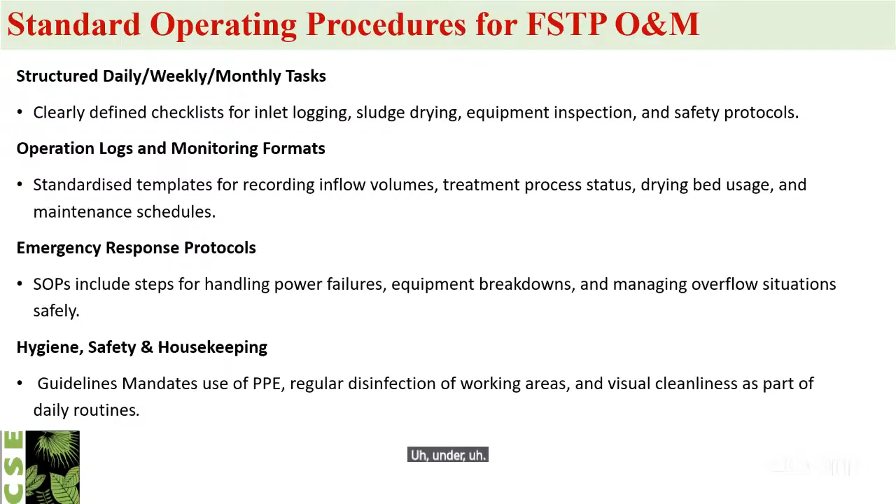So that is also happening. And safety is strictly enforced through guidelines. We mentioned PPE definition, disinfection routines, and equipment inspection, and everything is provided in the operating procedure. Next.

What are the challenges we faced in the gravity-based system? Mainly, in the screen chamber, desludging operators come and unload immediately, in a short span of time. Normally unloading a desludging vehicle takes 1 minute. The major issue is overflow from the screen chamber, and that overflow material is sent into the stabilization reactor. This affects the pump, and grit accumulation happens.

That's why we are fixing the timeline. Once the desludging operator comes to the treatment facility, it will take 7 to 10 minutes. Proper controlled discharge is regulated, so it will not affect the SR, and overflow and grit accumulation will be controlled. These challenges we faced and also addressed.

And for the stabilization reactor, once the screen chamber is controlled, the stabilization reactor does not get floating material. So that is also regularized, and the pump choking is sorted out. Initially, when we were starting in 2018, we faced a lot of issues; the plant operators didn't know how to unload.

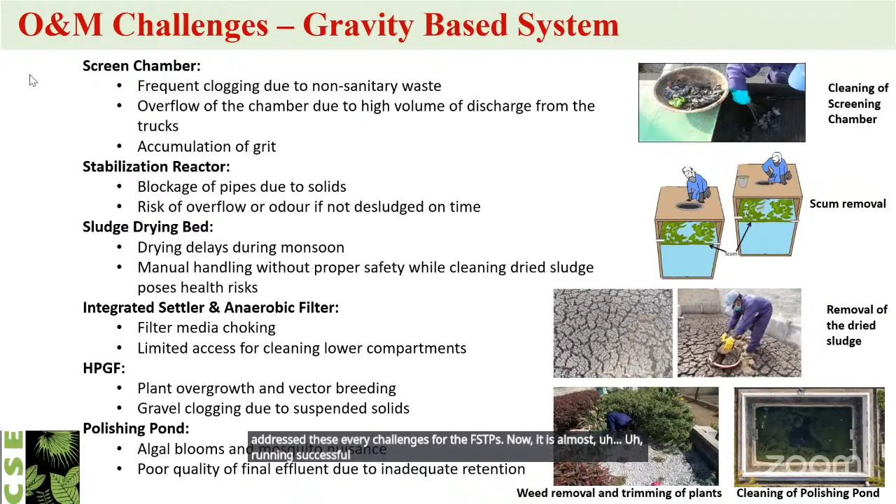One of the technologies, next slide.

So here initially we faced a lot of problems. In the gravity system, anyone can easily maintain it. This mechanized system, only some experienced person should maintain. So we faced challenges finding persons who will maintain the plant. So we gave training to a lot of people, and we procured some diploma holders and ITI-failed persons. That kind of person we procured and trained, then only the plant operation will be successful.

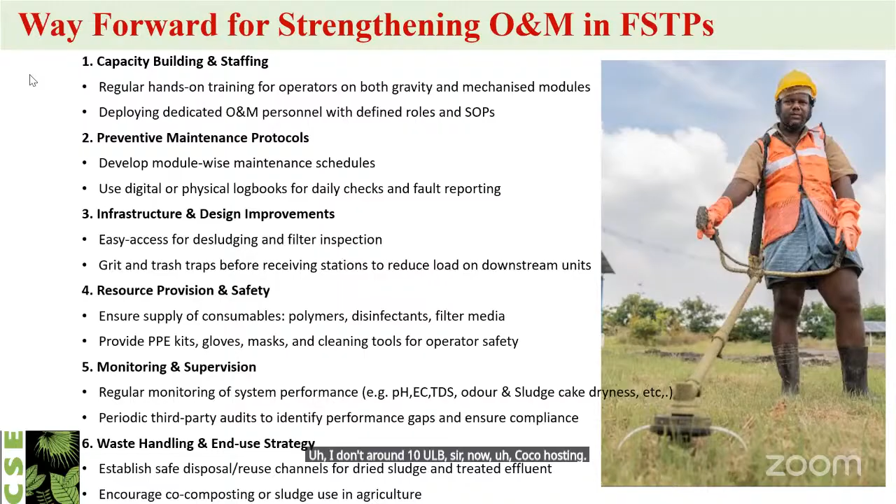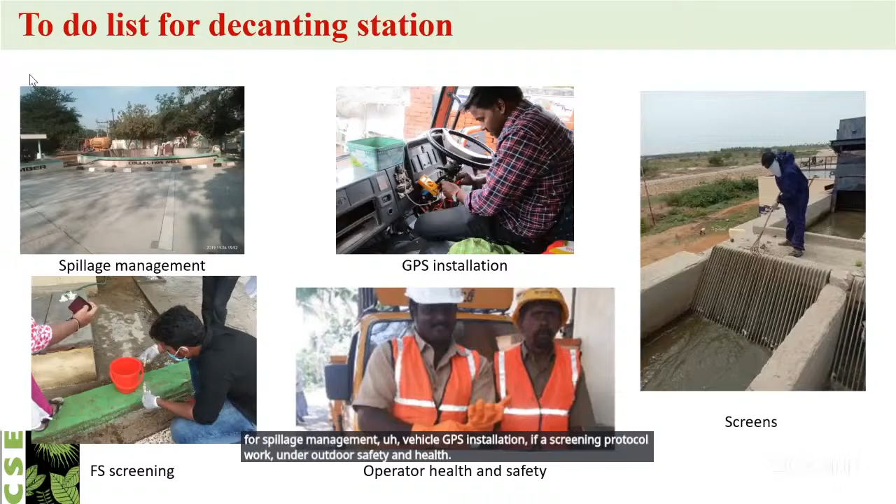And sampling that co-treatment decanting station. Mainly, we are looking at spillage management, vehicle GPS installation, FS screening protocol, safety and health, and frequently removing screenings. This is under the to-do list for decanting facilities. Next.

So, current status. Tamil Nadu has 51 FSTPs. Of that, 41 FSTPs are now operational. Around 2.3 million people are served by those treatment facilities. Another 10 plants covering an additional 1.1 million are nearing completion. Co-treatment of fecal sludge at existing sewage treatment plants is already in place in 48 ULBs, benefiting 8.3 million residents.

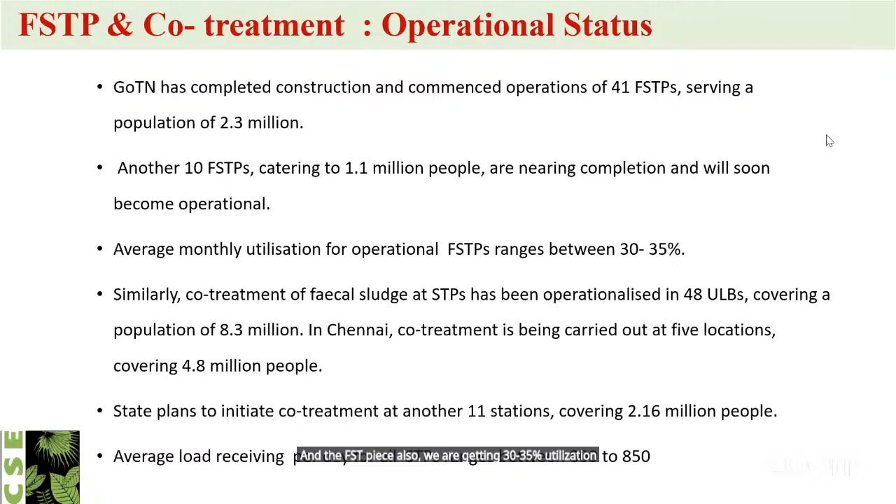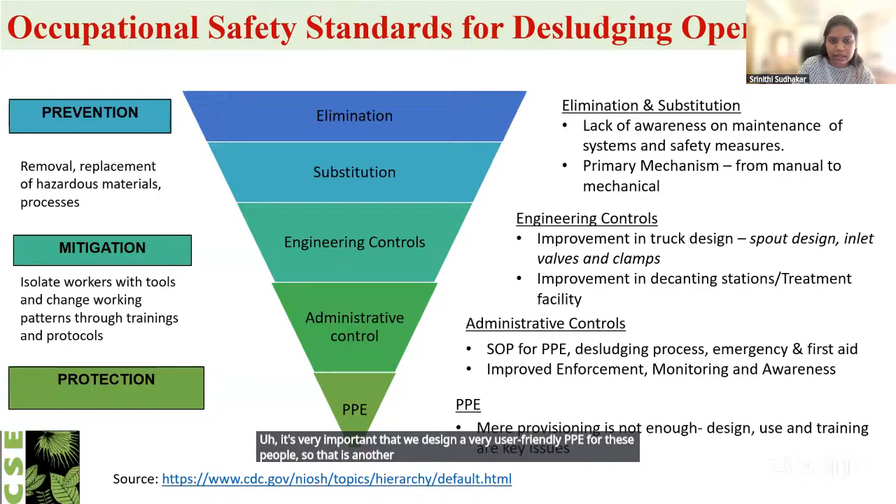And in terms of sustaining operations, again, like Sasi told, we've initiated urban-rural clustering to increase utilization of these treatment facilities. And also we work with the government in getting a directive out so that all these community public toilet loads are directed towards all these treatment facilities to increase utilization. And then also different capacity building, which Sasi had mentioned, whether classroom trainings or exposure visits or peer learning, or even online.

Stop sharing. Yeah, that's it. That's the last thing.

So these were some of the steps for strengthening and sustaining, in terms of assigning responsibility and also ensuring that funds are there to run these FSTPs, especially in smaller ULBs. Yes.

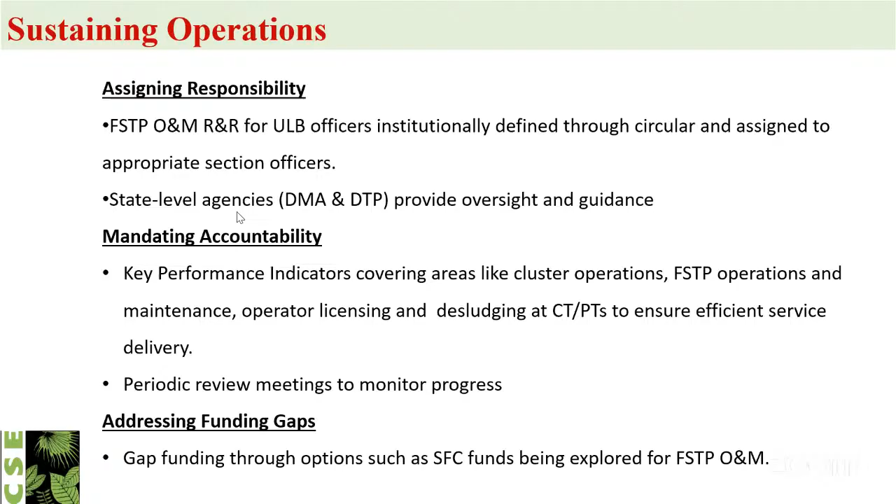Thank you, Shashi. Thank you, Srinithi. I understand the time allotted is not that great. It's only 15 minutes of time. However, you have taken 18 minutes of time.

Anyway, thanks for sharing the scaling up journey of TNUSSP, how the entire state is brought under operation and coverage, and how rural-urban convergence is also taken care of through phased steps. And you have also shared how SOP is being followed in operation and maintenance of your FSTPs. And also the last couple of slides are very crucial, which talk about occupational health and safety of sanitation workers, and especially the three-phased approach, which is prevention to mitigation to protection. These are very important steps. Thank you for sharing everything.